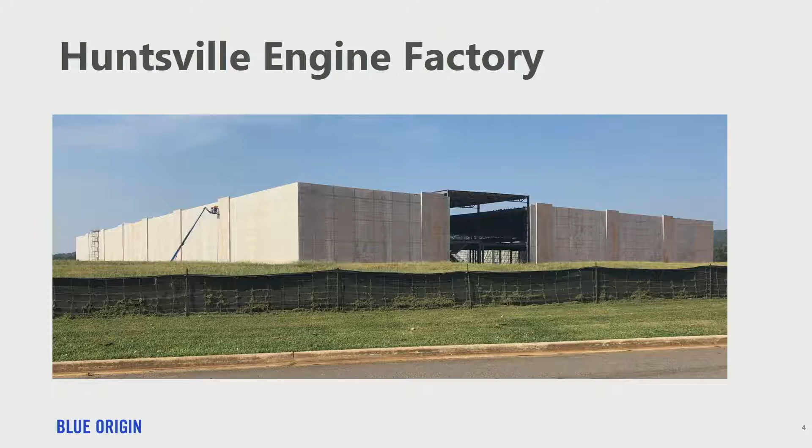We'll build the BE-4 and BE-3U engines, which will be used on our New Glenn launch vehicle. BE-4 will also be used on ULA's Vulcan launch system, just down the road in Decatur. We've also taken over Marshall Test Stand 4670 to do testing of engines, the acceptance testing of the BE-4 and the BE-3U engines there as well, just across the road at Marshall.

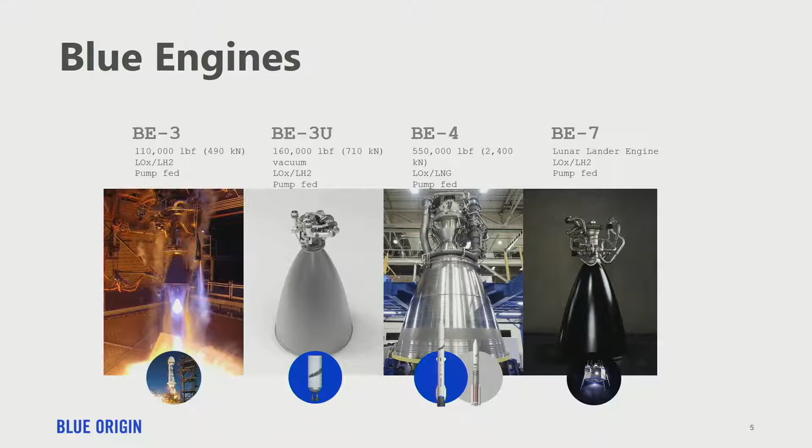So the engines that we produce right now, real fast: BE-3 is flying our New Shepard vehicle. BE-3U is a hydrogen upper stage variant of the BE-3 that will go on New Glenn. BE-4 is a LOX methane first stage engine at 550,000 pounds of thrust, and the BE-7 is our new lunar lander engine at about 10,000 pounds of thrust.

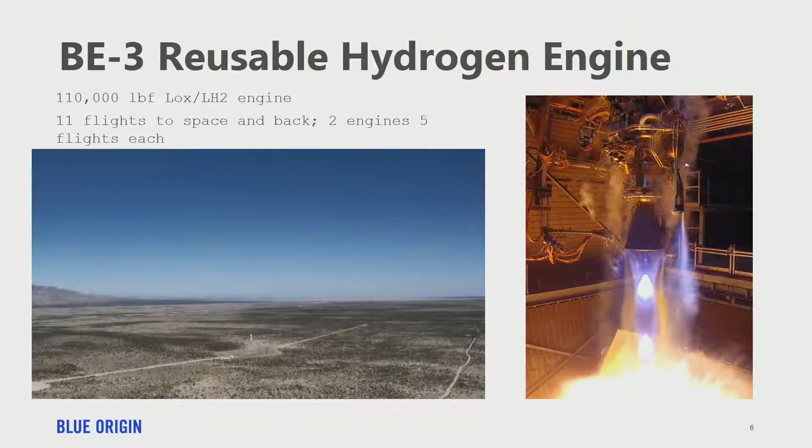Let me just real quickly show you each of these engines. The BE-3 has flown to space on 11 missions of New Shepard. 2 engines have done 5 of those flights each, so each one did 5 flights to space and back, with a relight of each engine as it lands.

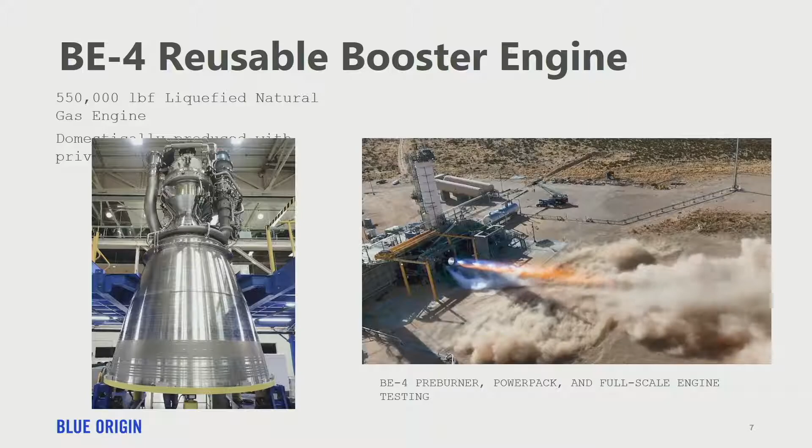Our BE-4 engine is 550,000 pounds of thrust. We've tested it at full power already, 102% in fact, with thousands of seconds of test time on that engine so far. These are all being tested down at our Texas site before they will start, I think next year if not the year before, being tested at Marshall 4670.

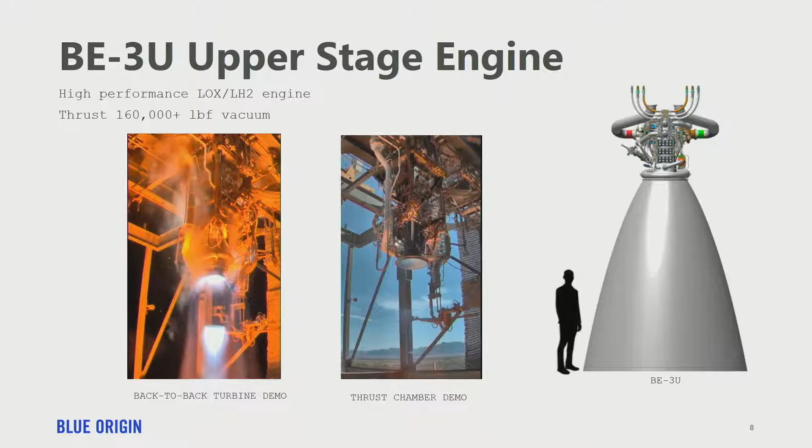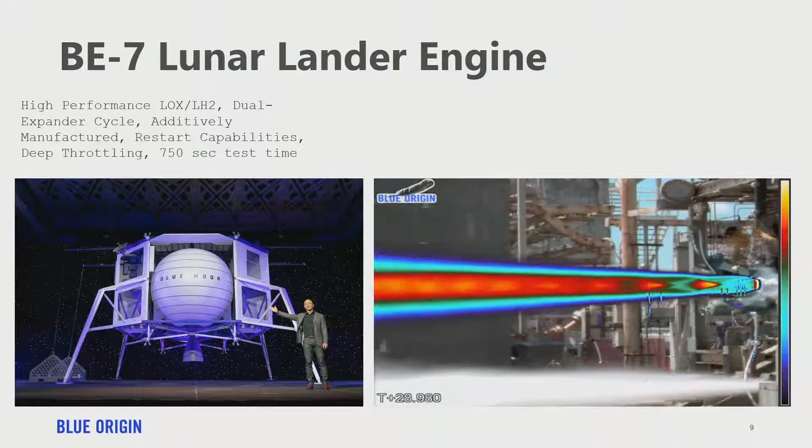Okay, next, Dave's going to talk about Moog.

All right, thank you, Mary Beth. I'm Dave Chaves with Moog, and when I come to forums like this, I'll introduce myself and somebody will say, oh, I know Moog. And the next thing out of their mouth is, oh, I know you for one of two reasons. One is I know you for actuators. And so, yes, we do actuators. We've been doing actuation essentially since the founding of the company back in the 50s.

So we had an electrohydrostatic actuation TVC system on that, on Ken's static fire test. The other answer I'd get when I introduce myself and say I'm from Moog is, oh, I know Moog, you make valves. And yes, along with motion control, we do fluid control as well.

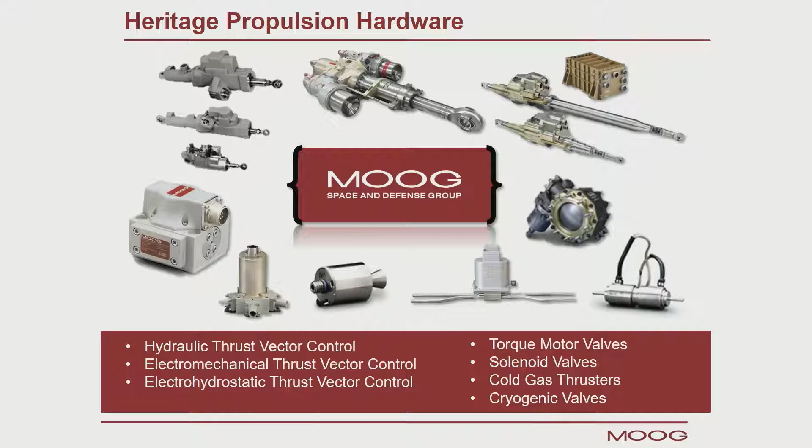So we make valves for different size engines, for in-space engines. We make valves for liquid launcher engines. We make cold gas thrusters, a lot of different components used on the engines themselves. But maybe you don't know Moog for some of the other things that we do. So along the way, we've acquired some additional technologies, and I just want to talk about those for a minute.

We have electromechanical actuation for on-orbit use that can go for anything from a solar array drive to a gimbal assembly on an electric propulsion engine. We make motors, slip rings, fiber optic joints, down kind of one tier down.

We also make a lot of vibration control equipment. So Softride is to isolate payloads, full payloads. We also isolate components on orbit, as well as make the ESPA ring, which most people are familiar with.

In 2012, we purchased AMPAC-ISP up in Niagara Falls. It's about 30 miles away from our headquarters, and so now we're also in the small thruster, on-orbit thruster business, as well as making tanks and small propulsion subsystems. And then lastly, we purchased Broad Reach Engineering, which makes on-orbit avionics.

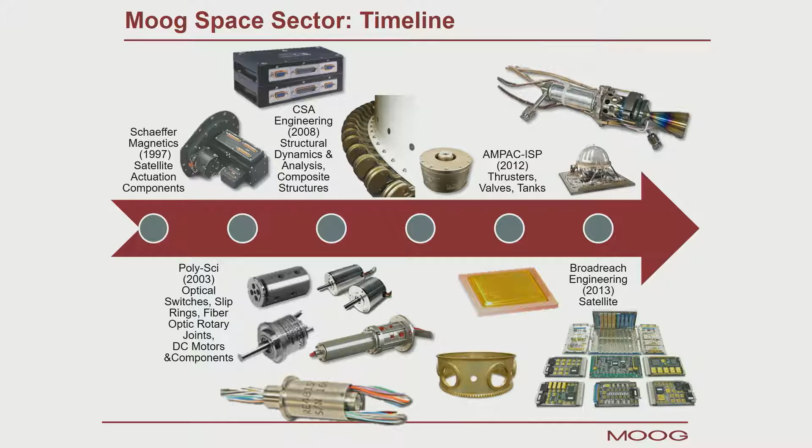Some of the advancements we've been working on most recently - we have an additive manufacturing center at our facility in East Aurora. We have about 15 additive machines as well as a full materials lab to go with that, so we've been doing a fair amount of research in the additive manufacturing area.

We have a fair amount of capability in high-power electronics. We've acquired or built that capability over time, driving our electromechanical actuation systems. And we've leveraged that into a very high-efficiency DC-DC converter that can be used on applications like a PPE or wherever we need to convert high power.

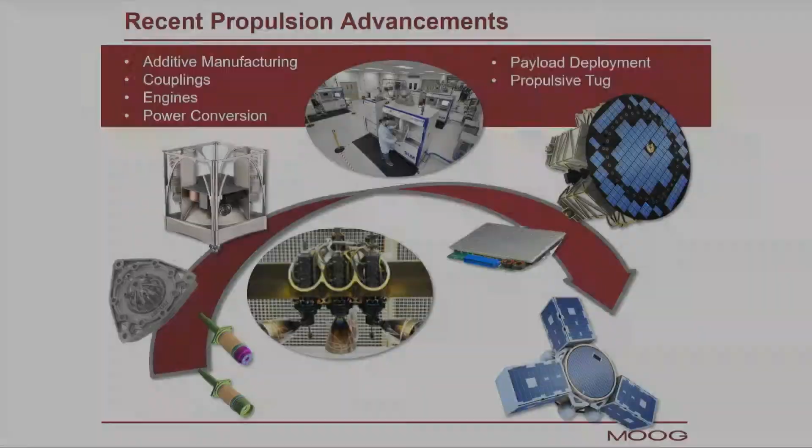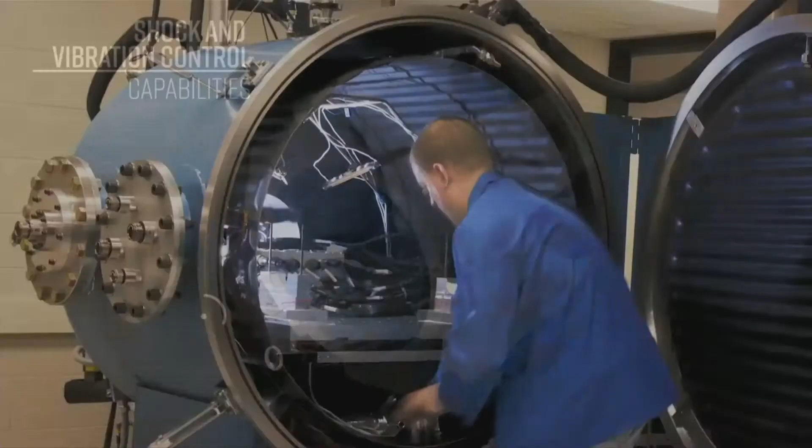Thank you, Mary Beth. So I have a recurring discussion with my dad. He's a business professor, has no space background, only knows what he reads about in the newspaper. And the discussion always comes down to his point: why is it so hard and why is it so expensive to do space flight? And my answer always boils down to, well, physics, Dad, and don't you know about the rocket equation?

And then we changed the subject. But that conversation got me thinking: why is there such a disparity between my dad's perception of where we should be in space flight and my perception, maybe with a bit more insider information on why we are where we are.

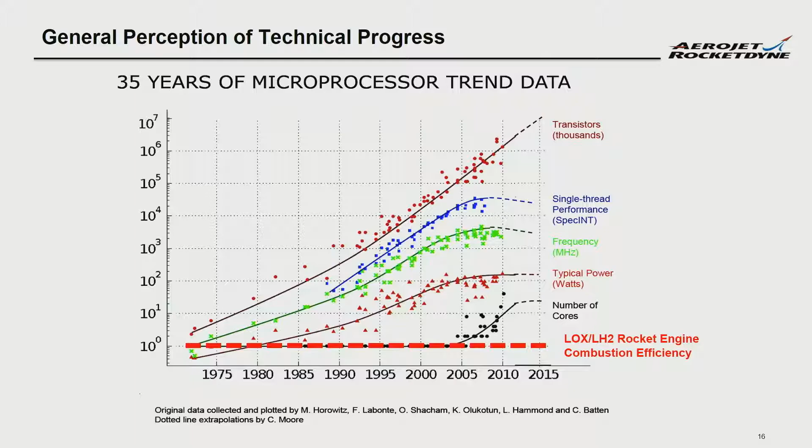First, I think NASA made a very smart decision in selecting the RS-25 and the RL-10 as the primary liquid propulsion solutions for the SLS, because quite frankly, you're not going to get much better from a performance perspective. We have 16 engines on RS-25 ready to go to support the first 4 flights of SLS. The new engines are in production right now. Similarly on the RL-10, the first ICPS engine is down at KSC ready to go. We've finished qualification on the first 4 engines that will go into the EUS upper stage.

From the performance perspective, our focus has shifted away from performance, because quite frankly, we're at a marginal gains perspective. We're focused on how do we reduce the cost, how do we improve the reliability, and how do we cut down on the lead time to produce these engines. That's where the focus, at least in propulsion on the booster side, has been on additive manufacturing and other manufacturing technologies that can accomplish those objectives.

That's where RS-25 is starting to leverage additive manufacturing in its design. RL-10 recently is moving to what we call the CX configuration, where we've got a fully AM'd combustion chamber and injector. So that's where our focus is on propulsion.

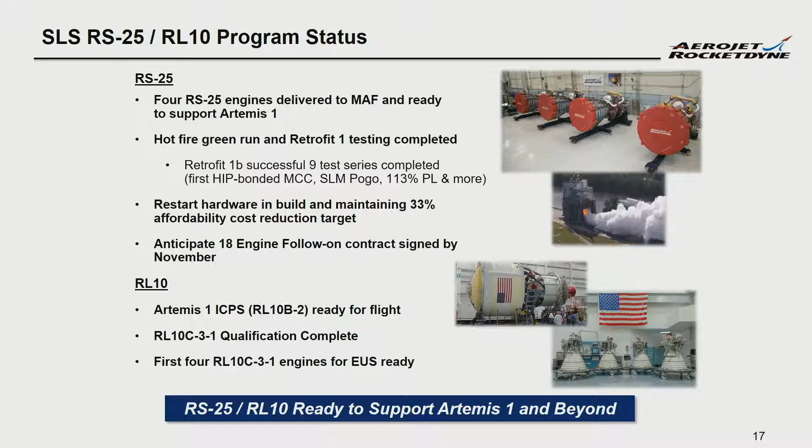Second, since this is a panel on new propulsion, if chemical is kind of tapped out - and don't get me wrong, chemical propulsion remains incredibly challenging to do, especially booster propulsion - we've got to tap new sources of energy for our propulsion, and the obvious ones are solar and nuclear. So from Aerojet Rocketdyne's perspective, that's where we are focusing. The one advantage we have there is a lot of the focus now is how do we operate in space. Having a greater than 1 thrust to weight ratio remains critical for launch, but once we're in space, we have a little more freedom.

So that's where solar electric propulsion is becoming extremely important to our business, and I think to NASA's plans. It's not something that is new to us. We've been flying very high power systems on national security and comms missions. We're working with NASA very closely.

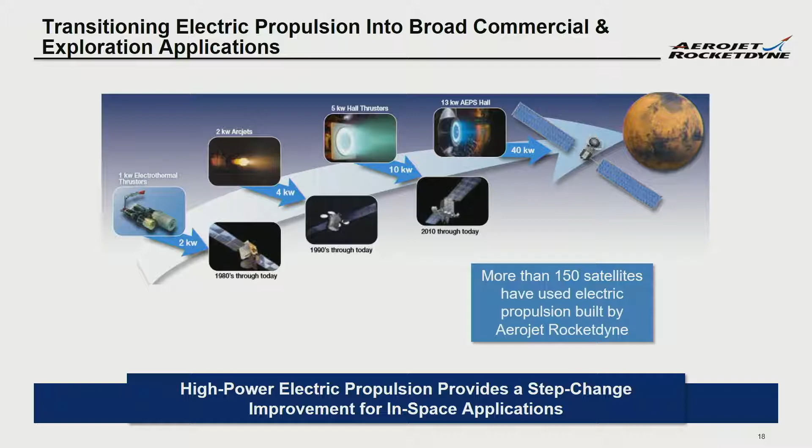And then nuclear. Nuclear's been around for a long time. There are no new ideas in aerospace, but what has changed? The ISP is roughly double the best chemical systems, but the big game changer is the use of low enriched uranium for the reactors, and that gets us through a lot of problems that you had using highly enriched uranium and all of the problems associated with that.

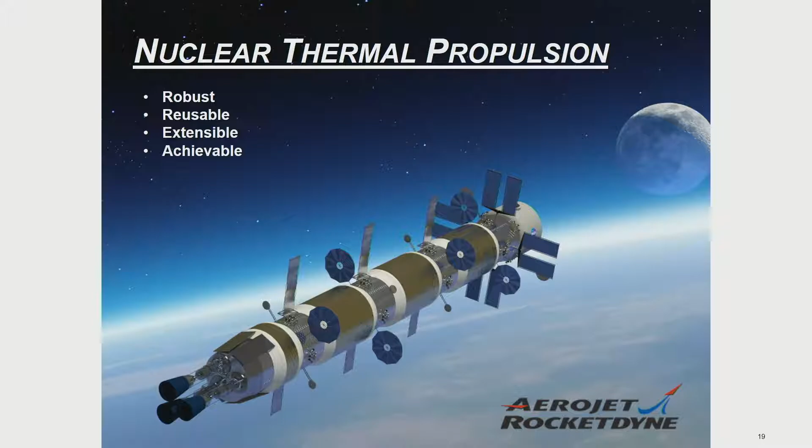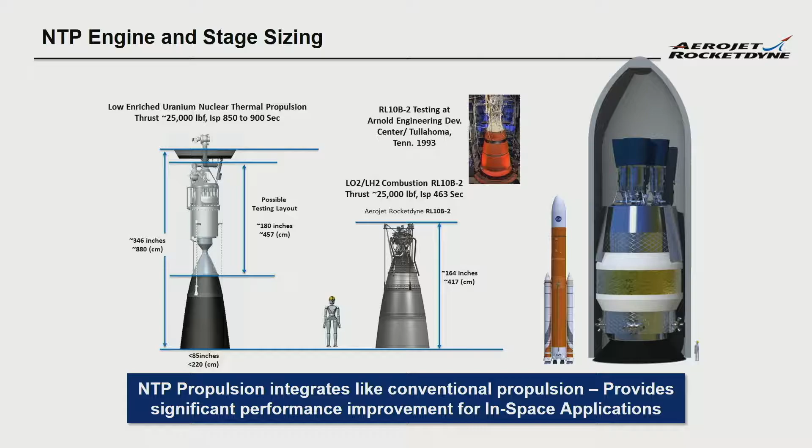So pretty cool. We're really looking towards in-space as where we advance the technology. Booster propulsion, upper stage propulsion will remain the core of our company, but it's marginal gains. If we want to do game-changing stuff in propulsion, we've got to focus on the in-space work, and a lot of that is what we're working directly with NASA on.

The NEXT-C program, the AEPS thruster program, the 100 kilowatt NextSTEP are all enabling, and particularly if we're talking crewed Mars missions, eventually NTP I think is going to be extremely important.

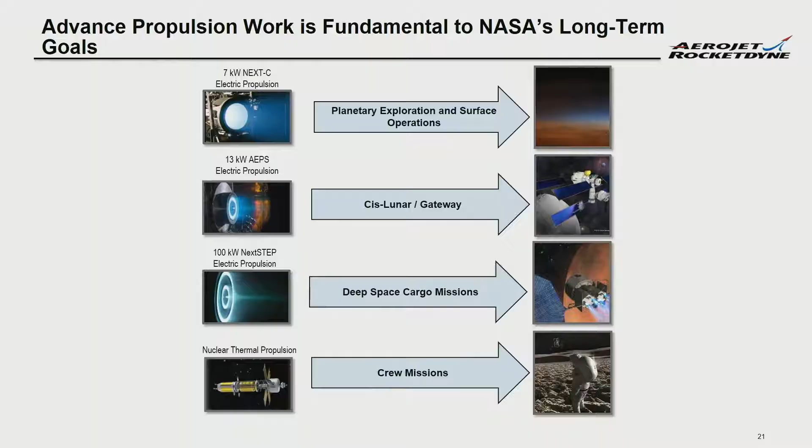So, thank you. Great, thanks, Tom. And last, Kent, will you talk about what's going on at Northrop Grumman? I would love to, especially if Tom hands me the clicker. I'll even hit the button for you.

Thank you all for coming today. What I'm going to talk about is what's been going on at Northrop in the solid rocket motor propulsion world. Probably the easiest way to describe it is through a launch vehicle, a launch system that we're developing, Omega. We have a model outside in the lobby of Omega.

In the propulsion world, we know the space shuttle motors were segmented. Space Launch System motors are segmented. So segmented motors are nothing new. What is new with these motors are the propellant that we're using and their composite cases. The composite cases give you a great strength to weight ratio, and on the larger motors, it allows us to run pressures that can give us better efficiencies out of these motors as well. The first stage is 2 segments, and out of those 2 segments, you roughly get a couple of million pounds of thrust.

Our second stage is a single segment, and it's just under 1 million pounds of thrust. That second stage motor is common between our intermediate and our heavy. The reason we have 2 systems, or this system was designed, was to meet the Air Force's national security space launch missions. They vary from fairly simple LEO missions to fairly complicated direct GEO missions with large, expensive payloads.

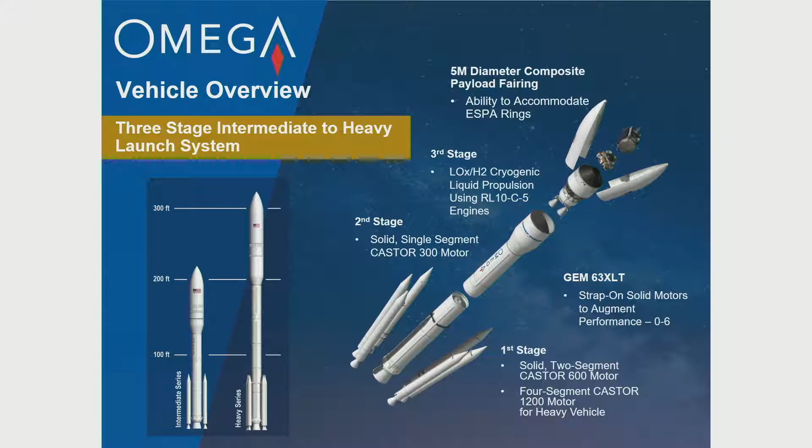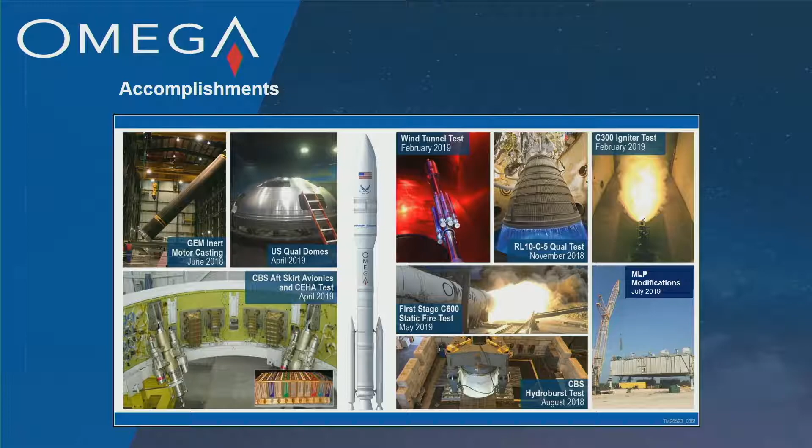Unfortunately, not going to the moon. But I put in a slide with large solid rocket motors.

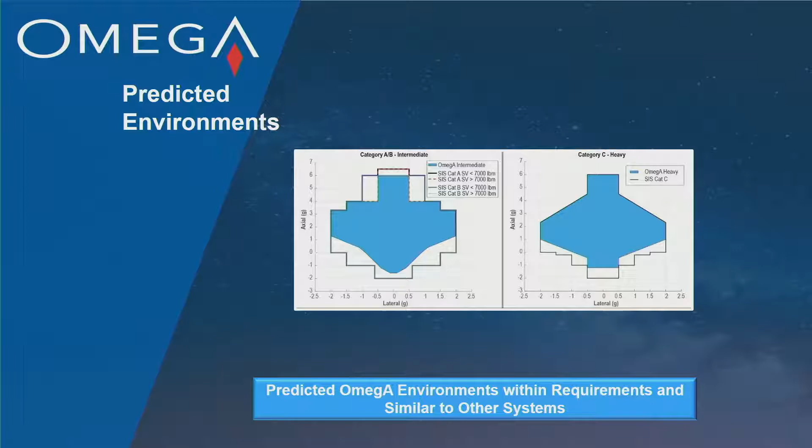Lastly, this technology we're using on Omega, our motors are the same diameter as those on Shuttle and SLS, so it has great applications to the booster obsolescence for SLS. So with that, I'll turn it back over to Mary.

Thank you all for your introduction about what exciting things are going on in your companies on propulsion. I'm just going to ask a few questions to get us started, and then we'll open it up to the audience. First, Brett, can you talk about, as our focus shifts from low Earth orbit to the moon, what do you think the gaps in propulsion technology are that need to be addressed?

So I think some of the other panelists also mentioned that in-space propulsion is very different from boost propulsion. In space, you don't need a thrust-to-weight of 1, but you really need high efficiency. So we're developing a LOX hydrogen engine, the BE-7, for a lunar lander for in-space application, as well as our BE-3U upper stage engine, which is much bigger at about 160,000 pounds of thrust. The point was also made that nuclear propulsion is sort of the ultimate of where we want to go, because it's important for higher efficiency and higher ISP in the long term. But in terms of NASA's Artemis program and eventual Mars missions, foundational for that is high efficiency LOX hydrogen propulsion, and we've been working on that for over a decade now.